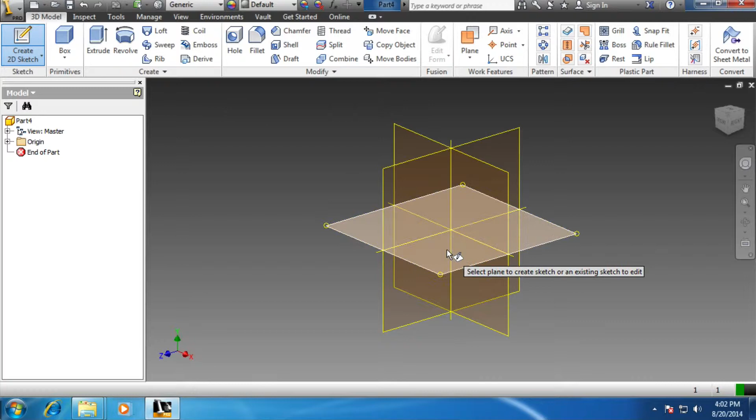As we saw in class, we create a 2D sketch, we select a piece of paper to draw on, and then what we're going to do is draw a rectangle for my ruler. I'm going to start it here, and I want this to be 6 inches by 1.5.

Matt, but I thought we were making a 12-inch ruler. Well, you are. I'm making a 6-inch ruler. So it's a challenge to you that you should do a 12-inch ruler and see if it shouldn't be a big challenge, but I'd like you to do it.

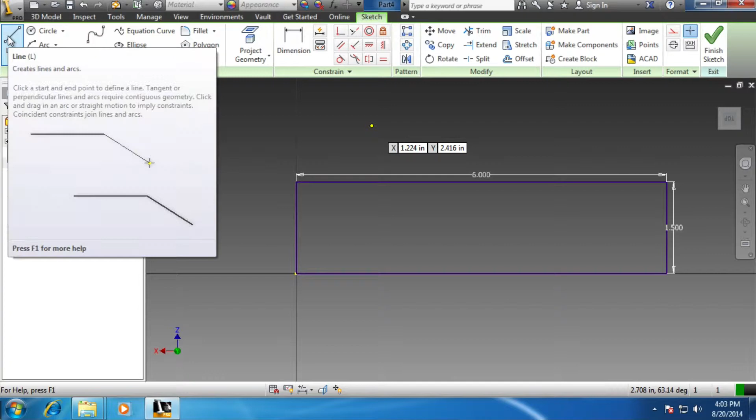So the first thing that I need to do is I need to drop in some lines. So I've drawn my rectangle, I've given it some dimensions. I did that by entering 6, I hit Tab, I entered 1.5, and then I hit Enter, or Return.

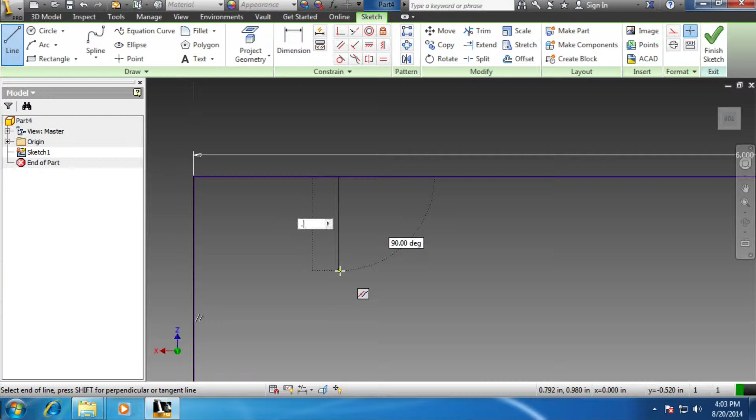So to put in my 1-inch line, we come up to the line and it sort of snaps to the line. It's really handy that way. I can zoom in a little, click once, drop it down. Let's make this 0.3 inches long, and I hit Enter. Now I'm going to hit Escape to quit drawing lines.

And I need to dimension this line. So I want it to be from this spot to this spot. And currently it's 0.792. Well, I want that to be 1 inch. Bam! 1 inch. It's amazing. And I'm going to tap Escape to get out of that tool.

Actually, I'm going to come in here. See how if I hover over this, I get this little wah wah sign? That's a technical term. I'm going to click on the dimensions and drag. So I can actually move these little dimensioning lines around, which is kind of handy.

Now I've got 1 inch, and I really want to focus in on the 1 inch. In class, in the previous video too, we saw we can repeat that. Well, I'm not going to do that yet. Zoom to fit, then zoom in a little more on just the inch. Let's go with my pan tool.

I'm going to draw another line. This time I'm going to go successively smaller. Let's do a 1/2 inch. I'm going to make this 0.25.

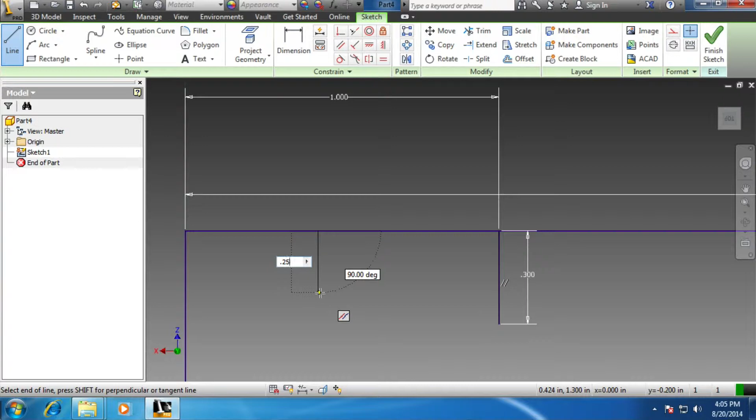Matt, how do you know to make it 0.25? Well, you see, I've got some notes, and I've already decided how long all these things are going to be. You can make these lines as long as you want on your ruler. You have that freedom. So I'm going to go ahead and drag this over here.

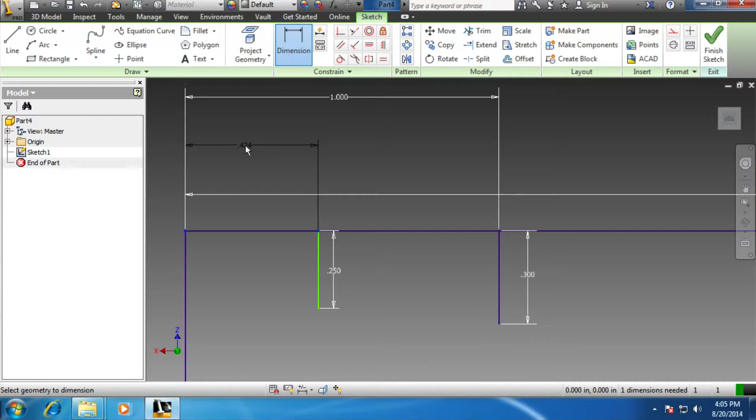And we have to decide, or tell Inventor, that we want this to be exactly 1/2 inch away from the edge. So I'm going to say 1 divided by 2. Enter. That's 1/2 inch, and it becomes 0.5. 1 divided by 2 is 0.5.

All right, so we've got a 1/2 inch mark and a 1 inch mark. And we don't need to repeat this, because if we repeated it, I'll show you what I mean by this being a problem. I could select this one, and then I could select the direction, and I could flip it. And if I make it 0.5 inches, you see how it puts one right here, and there's already a 1 inch line? That's a problem.

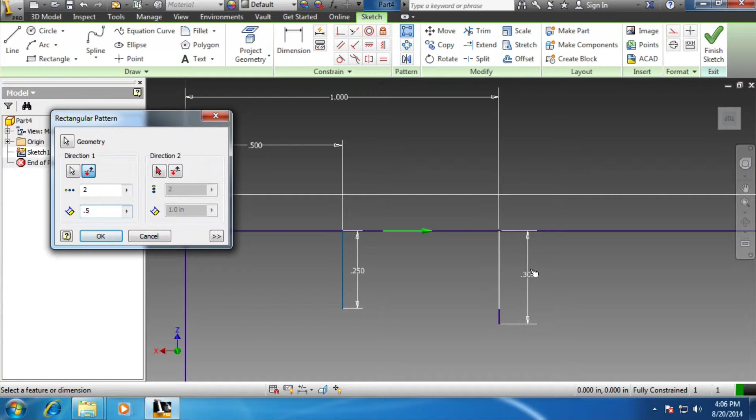The laser cutter could do two things. It could crash, or it could come in here and do the 1 inch line, and it could later come in and do another 1/2 inch line. And if it did that enough times, we could damage our part, we could damage the laser cutter, we could start a fire. I mean, cats and dogs living together - who knew? So we're going to try and make sure we don't cause any repetition that overlaps.

Let's come in here now. We've done 1/2, so now we need a 1/4 inch. So let's do this at 0.2 long.

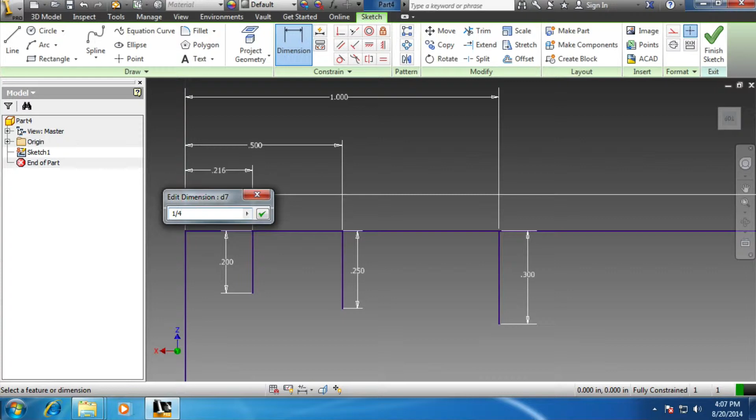Hit Escape. And I come in and I dimension it by grabbing that end, and I grab the corner, and I'll bring my dimension lines up, and I'm going to do a 1/4 inch, 1 divided by 4. So now it's in a nice place, but I really want another line over here.

So that calls for the rectangular pattern tool. We saw this a couple of times, but the first thing we do is when it says geometry, it's sort of like feature - it means give me some geometric thing, and a line is a geometric thing. So we'll select a line.

Now we have to come in and say, well, what direction? What's going to determine the direction? If we select this line, it means we want to go along this line left to right. The arrow, however, is telling us it's going to go right to left. That's no good, so let's flip that.

And we want this - well, how far do we want it to be? This is the 1/4 inch mark. We could start with a 1/4 inch, but we see that it's right there. So even if we said we wanted 3, it would give us 1 in this space in between, but it would have an overlap.

So what if I say, let's see, what's bigger than a 1/4 inch? A 1/2 inch? All right, if I say 2, so 1/4 inch and a 1/4 inch - 1/4 plus 1/4 is 2 quarters.

2 quarters, 2/4 becomes 1/2. You could also think of it as 25 and 25 cents becomes 50 cents, and cents means parts of 100. So 0.25 plus 0.25 is 0.5. There we go, this 1/4 inch is a 1/2 inch away from this mark, and we don't have anything drawn here. So now we've got those 0.5 apart.

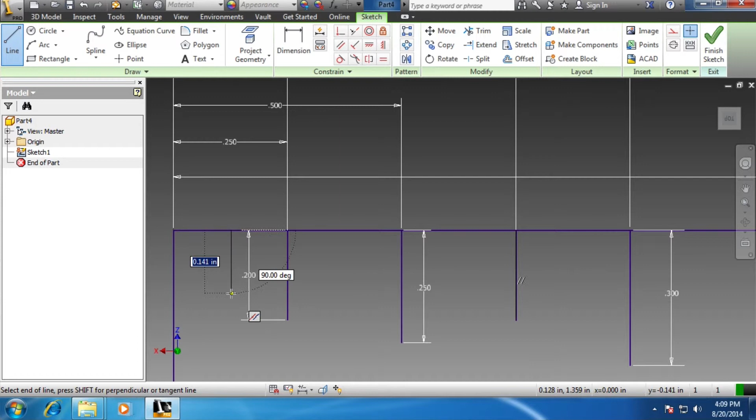And let's make those 0.15. Okay, I hit escape, and I want to dimension that line. So I go from the line to the corner. I got pretty close on that. 1 divided by 8 is 0.125.

So now let's repeat it, and we want to repeat it not 1/8 but 2/8 away. That's one way we could do it too. We could come in here and say the direction is this way. Go to the right, please.

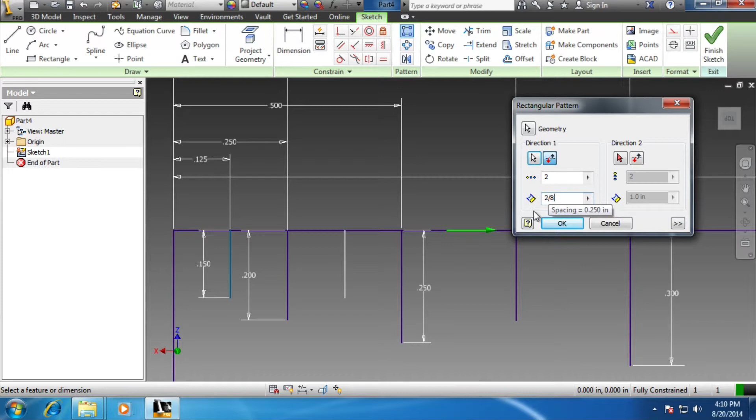And it's going to be 2/8. Ooh, tricky. So if we were to reduce that fraction, look at that. If I hover over it, it even tells me that's a 1/4 inch, 0.25. So that's really handy. But I can even, in this case, go 1 2/8. Let's repeat that. 3, is that enough times? No, do I need to repeat it 4 times? Ooh, yes. And I can say okay.

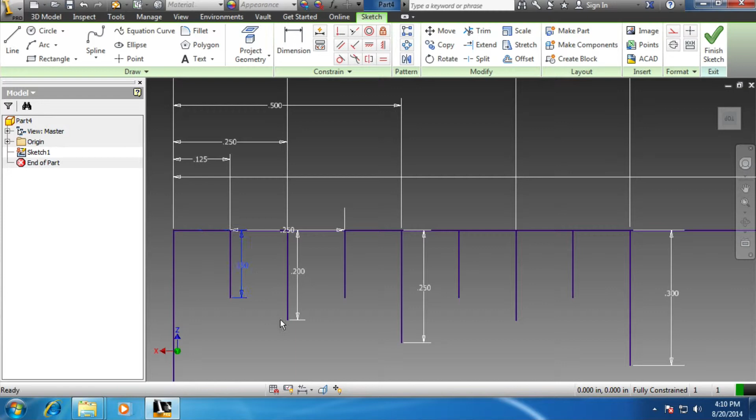Very fancy. Now some of these dimensions are getting in my way. I'm going to move this one over to here, and I'm going to move this one over to here. All right, so we have now the 16th inch. I'm going to zoom out just a little bit. Look at that, our ruler is coming along.

Come in and do the 16th. And how long does that have to be? I'm going to undo that. Undo, grab, undo. I'm going to come in, do that one, let's make it 0.1.

All right, and we have to dimension that. Grab the top, grab the corner, and it should be 1/16. Say OK, and I'm going to hit escape. And I'm going to move my little dimensions. Just why am I moving those? Because I'm paying attention to detail.

Now they're all on the right-hand side. Does it matter? Not really, not right now. Now we've got this 16th inch mark. If we go 1/16, we'll be here. This is 2/16, 3, 4/16. So we need to go 1 2/16 with our repetition.

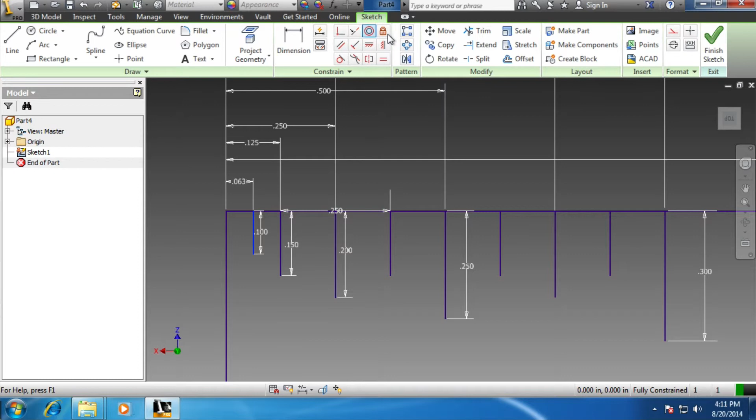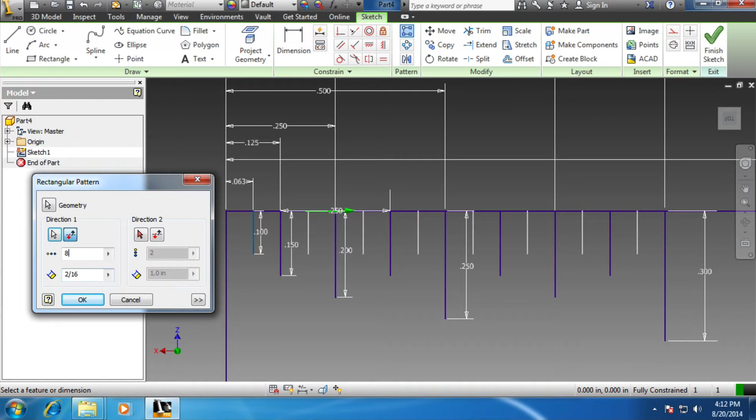So I need to choose the rectangular pattern tool. That's my geometry, that's my direction. Flip it, and the spacing is 2/16. Ooh, very cool. Now the repetition. I'm going to tell you that I think it's 8. It is 8.

So there we go. At this point, we have a ruler that is nicely put together in 1 inch, but we don't have the whole thing. So this was the last cool thing from class. Once we build part of a thing that's repeated, we can repeat all that stuff.

So I'm going to zoom in here. And the last piece here is, how do you select all these things? Now we could say that we want to do a repeat, we want to do this one, and this one, and this one, and this one, and this one, and this one. And I don't like the idea of doing that. That's really annoying to me.

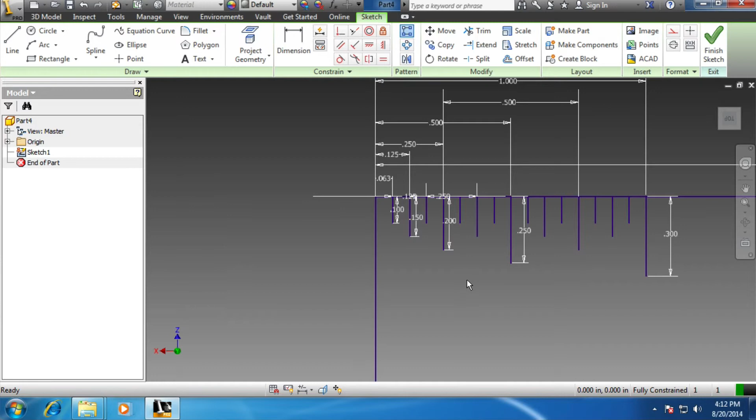So we could also select them. Now if we select from the right, I'm clicking and dragging to the left. Everything I touch will be selected. But that's kind of a problem. I'm going to do that again. Click, drag. So every single thing that the box is touching will be selected. And you see I selected the end of the ruler. Bad.

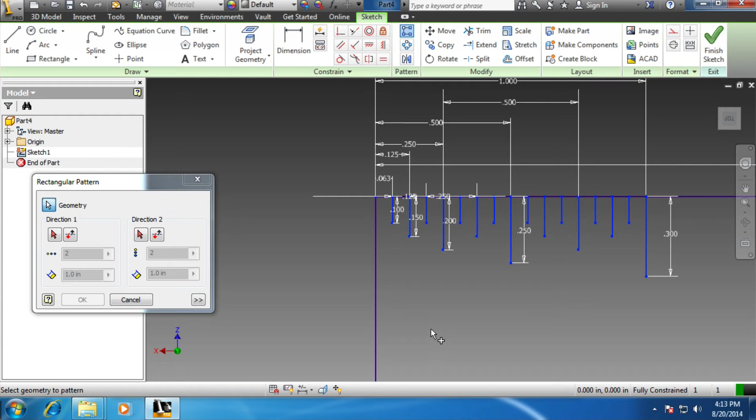Now I could fix that by just being a bit more careful, so I've only selected my lines. The other way to do it is if I go from the left to the right. Now only things that are completely surrounded by the red are selected. So you notice how this line is not highlighted, that's because I had to zoom out, I did not select this entire line. I would have to go like that, and I did not do that. I only selected the marks we made.

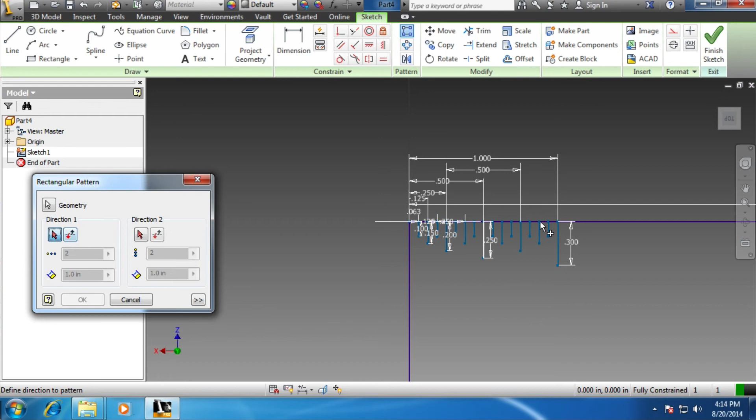So at this point, it's the same process. I'll zoom out a little so we can see. I'm going to pick my direction. That's the wrong way, I'm going to flip it. And then, let's see, I have a 6-inch ruler. So I'm going to repeat this 6 times.

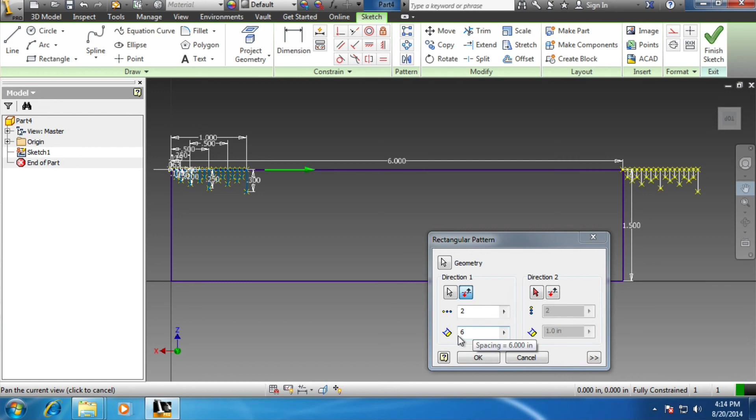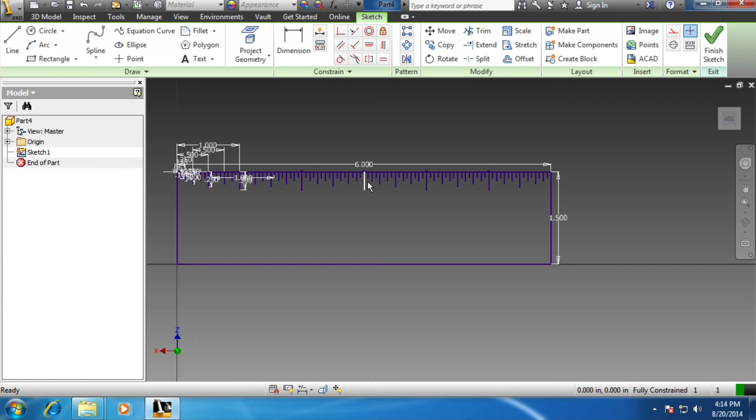Okay, that's no good. And as it happens, I did this in class, but I was confused in class, but now I'm smarter. I put my repetition in the distance space. That's silly. What I really want to do, and I really got confused in class, is I want to repeat this every inch, and I want 6 of them. I say okay, and now I have a 6-inch ruler with all the right tick marks in all the right places. And I think that is pretty cool.

So, the challenge for you, or really not a challenge but an opportunity to practice, is to do that with a 12-inch ruler, or 18, or whatever you like. And that's it for now.